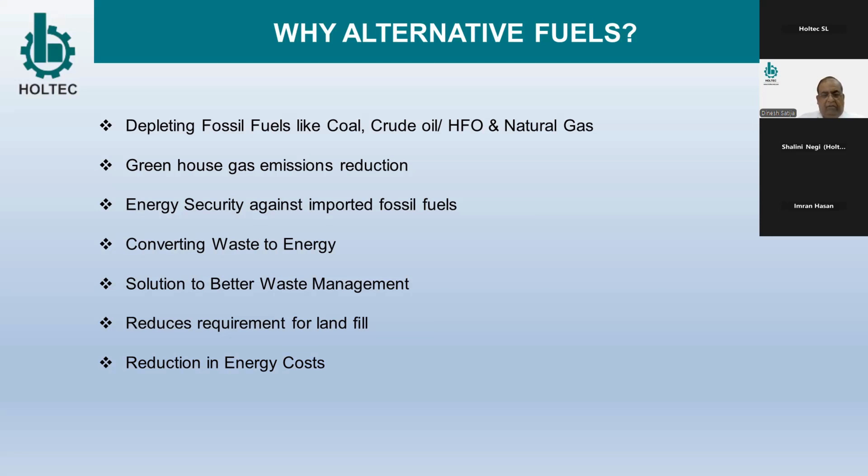And the final and most important part is energy cost. Ultimately, use of alternate fuels impacts your cost. It reduces your cost of production.

So today our agenda is basically focusing on the Indian cement industry. What is the AF journey? The alternate fuels have been there for 20, 30 years, people are using them. So in India vis-a-vis other countries, what is the journey for alternate fuels? Then, what are the available alternate fuels and types in India?

Then we will look at what are the impacts of AF usage, what are the technical advancements we foresee in the coming future with respect to preprocessing and co-processing systems in AF, what is the Holtec role for enhancing AF usage, and what is our global experience with respect to alternate fuel usage in the pyro process. We'll present one or two case studies about AF usage and Holtec's role in that.

So, Indian cement industry AF journey. If we look at the growth of alternate fuels in India, in 2010 the first CPCB guidelines came regarding co-processing, and AF usage was around 0.6% in 2010. From 2010, it increased very gradually to 1.1 and then 3% in 2016, when the hazardous waste management rules came into existence.

Then it shifted to include biomass, MSW, and other waste. Our usage was 4%, and it increased gradually to 6% in 2023. In 2025, we are expecting around 7% TSR.

This is an overall number. And by 2030, our industry target is 25%. So if we see from 2010 to 2025, 15 years, the increase is just 7%, from nearly 0 to 7%. But our target is now 25%, so the target looks quite huge. The target looks tough, but at the same time it poses a lot of opportunities for AF usage in the coming years.

So maybe in the next 5 years, you will find a lot of boost on alternate fuels from every quarter, and we can see a lot of changes take place with respect to alternate fuel usage. So if we talk of major players in the cement industry, where do they stand?

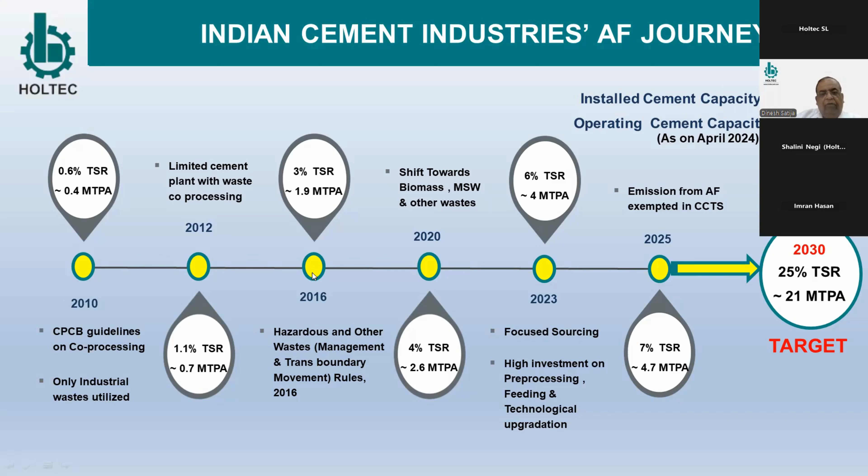Now, if we talk of 25%, we foresee the source of waste stream at that level. The various sources will be MSW, plastic, hazardous waste, liquid waste, biomass, paint, resin, carbon black, etc. The major source expected is MSW and RDF, around 10%, which is nearly 40% of the total alternate fuel usage. So MSW will play a very important role in the coming years. As we can see around us, there is a huge stock of MSW lying, which needs to be depleted in the coming years.

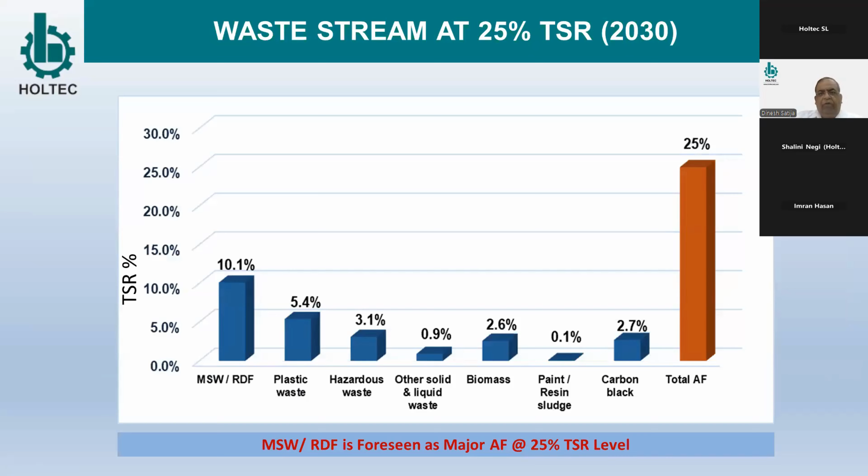If we look at the overall country situation, we have over 170,000 TPD generation of raw solid waste. Out of that, typically 20 to 23% can be converted into treated MSW or RDF. This potential is around 35,000 tons per day. If you see the breakup, organic waste constitutes 50 to 60%, and paper, cardboard, plastic, and other usable fuel materials work around 20 to 23%. Glass, metal, and other materials just have to be removed from the MSW. Looking at the cluster-wise distribution where cement plants are located, we find Maharashtra, Tamil Nadu, Gujarat, UP, and Chhattisgarh are the major sources of MSW serving in future, providing basic raw material close to the cement clusters.

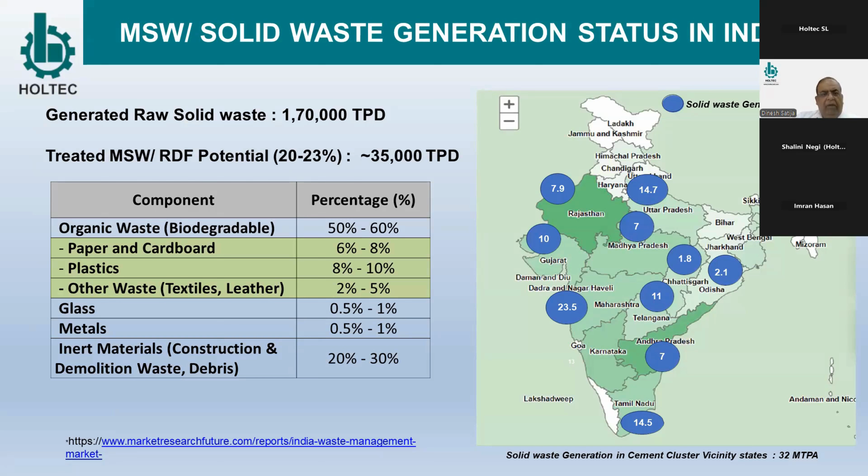If you look at the overall country situation, we have over 170,000 TPD generation of raw solid waste.

Now, what does 25% TSR mean? TSR is the thermal substitution rate in terms of heat. So if we say 25% TSR, we mean the overall saving in cost of production is around 175 to 200 rupees per ton.

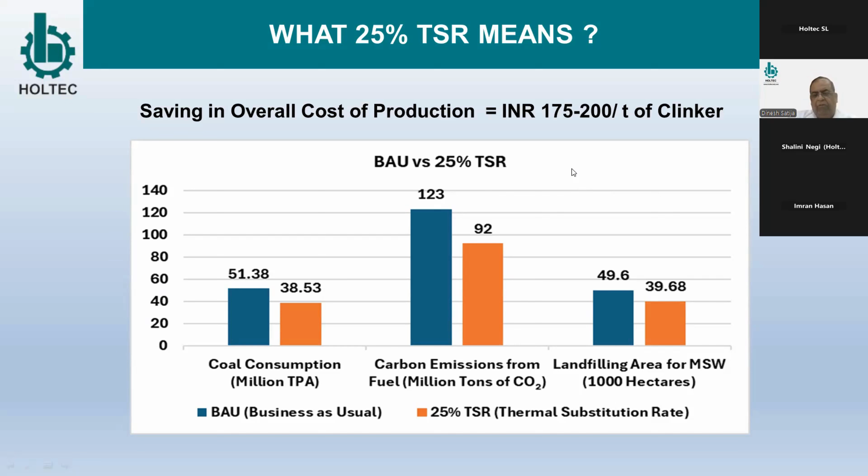If we talk of other components: if we continue business as usual without any effort on AFR, our coal consumption will end up at 51.38 million tons per annum. If we go for 25% AFR, it will get reduced to 38.53, around a 25% reduction in coal consumption. Similarly, carbon emissions will reduce by 25%, from 123 to 92 million tons of CO2. Landfill area will also reduce from 49.6 to 39.68 thousand hectares. So this is the broad impact of AF if we are able to achieve 25% by 2030.

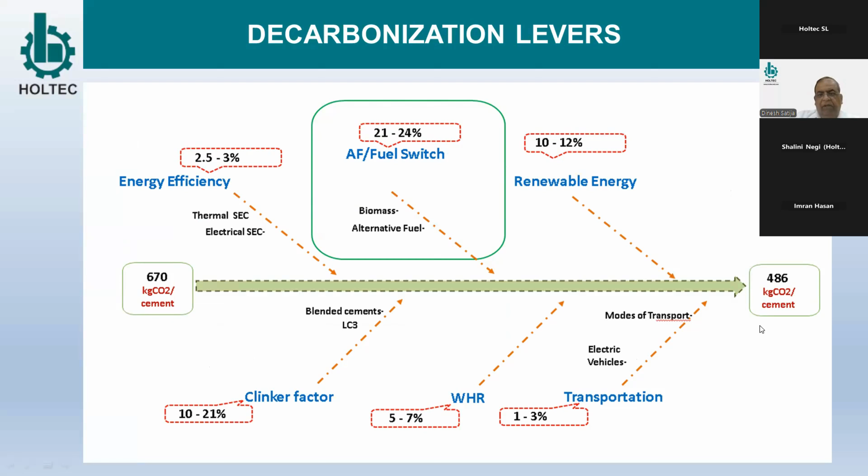Now, when we talk of alternate fuels, we are ultimately going for decarbonization. That is the long-term goal for the whole planet. So we are providing some decarbonization levers. If 670 is the current level, we can go up to 486 if the following measures are taken.

One is energy efficiency, with a potential of 2.5 to 3%. The Indian cement industry is in a very good position on fuel and power consumption compared internationally. The next factor is clinker factor reduction, which has a potential of 10 to 21%. Fuel switching to alternate fuel has a potential of 21 to 24%, which is very good. WHR offers 5 to 7%, renewable energy 10 to 12%, and transportation shifting to electrical and such offers 1 to 3%. By all these levers, we can bring our CO2 level down by around 25 to 27%, from 670 to 486.

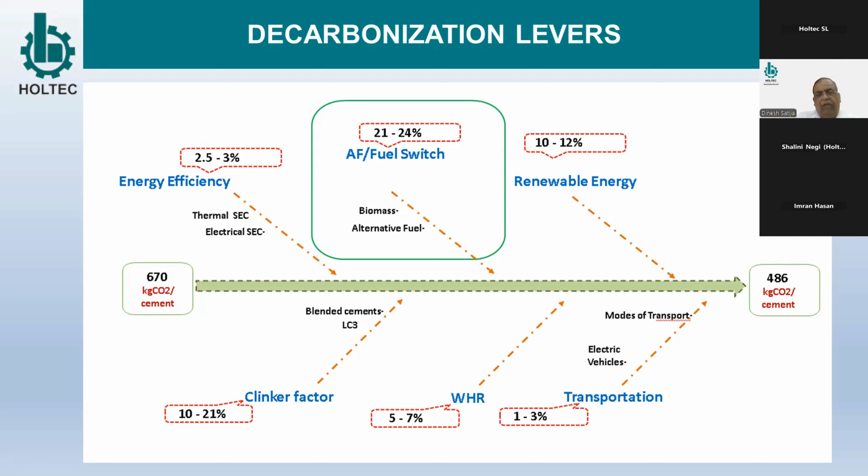Now, when we talk of India, we get interested in the global scenario. We are giving you details about various countries. On the right side, mainly European countries like Netherlands, Germany, and Austria are at 68, 71, and 76%. For Europe overall, around 46% is the average EU level. India is nearly at the bottom of the table, around 7%, along with China at around 8%. The world average is around 18%. So we are at a very low level, meaning the potential is very huge.

We can go to a much higher level, as we have improved in our power and fuel consumption figures. The AF consumption level also has a potential which has to be exploited in the coming years.

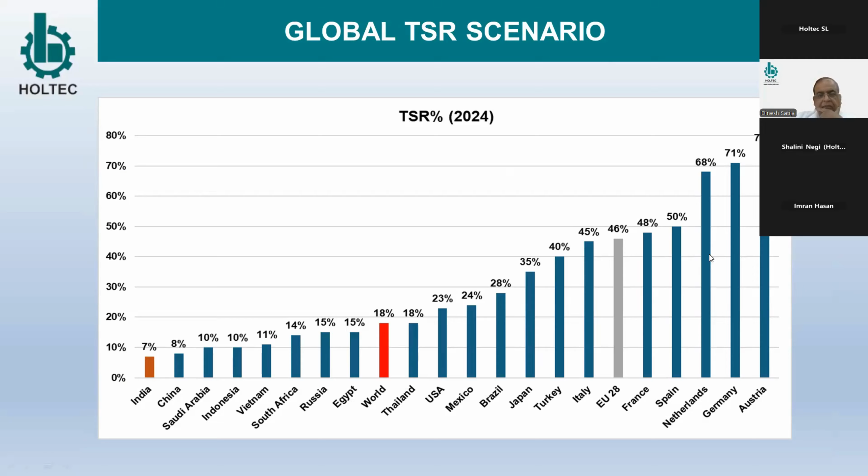We have summarized a few reasons why we are lagging behind the European Western countries. One is regulatory and policy framework. Western countries have very stringent norms, strong enforcement, and effective compliance. Whereas in Indian conditions, policies are there, but regulatory framework enforcement mechanisms are still evolving and compliance is weaker and less stringent.

There are some economic considerations too. Western countries' costs are going up because they're putting a lot of environment tax to discourage use of fossil fuels, but at the same time they're incentivizing alternate fuels, reducing cost and offsetting initial investment. Whereas in Indian context, coal is our main source of fuel and it's available within the country, so our cost of fuel is much lower comparatively, and financial incentives are relatively very limited. So initial investment and fluctuating availability are causing major problems, and that is also a deterrence.

Then waste management and supply chain. In European countries and the whole Western world, waste management systems are well placed. They have well-structured infrastructure and proper separation systems and processing units, providing ready-to-use alternate fuels to the cement plant. Here the situation is not like that. Waste management infrastructure is still underdeveloped. Collection, sorting, processing of waste is inefficient, leading to inconsistent supply of alternate fuels. So supply availability is really a constraint till our infrastructure improves.

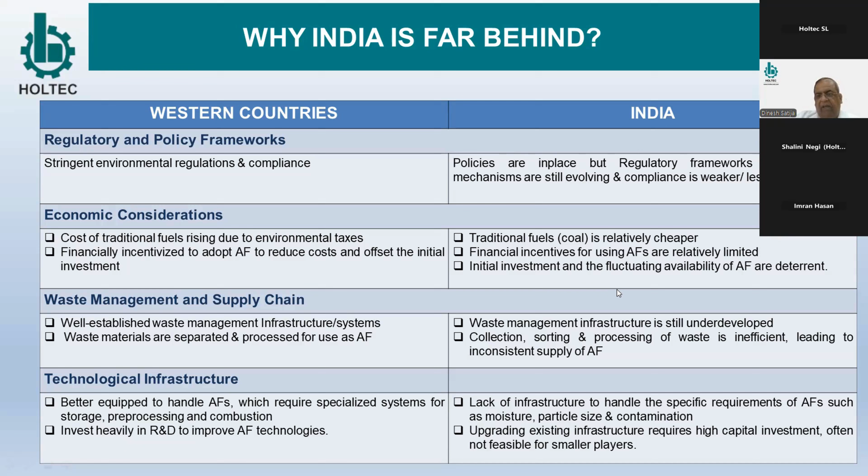Upgrading the infrastructure needs investment. So we find small players find it difficult to invest in developing infrastructure because their cost will be high if we go for higher alternate fuels. That is another hindrance.

Now, a lot of things are related with government policies and plans which we cannot control. But we can talk of infrastructure gaps for achieving 25% TSR.

Holtec has been studying this, going to various plants and studying the available infrastructure and issues. We find that pre-processing plants to condition RDF and other fuels suitable to kiln requirements are very limiting. There are very limited number of pre-processing units.

Alternate fuel storage and advanced fuel feeding systems, mainly related to infrastructure within the plant, are also very limited, but now it is growing. Many plants are investing now in developing proper storage, advanced feeding systems, and handling facilities for all the fuels. This is an upcoming thing - of late we find people going ahead with this kind of investment.

Then bypass systems - as we know, in India bypass systems are not available because we don't have the raw material like that, except in Gujarat, few plants in the Kutch region. The rest of the country hardly has any bypass system available. So all this has to be installed if we talk of our AFR usage, and that calls for investment.

Then fuel handling and firing system - we are mainly dependent on coal and solid material feeding, so our burner system and feeding system are available with that facility only.

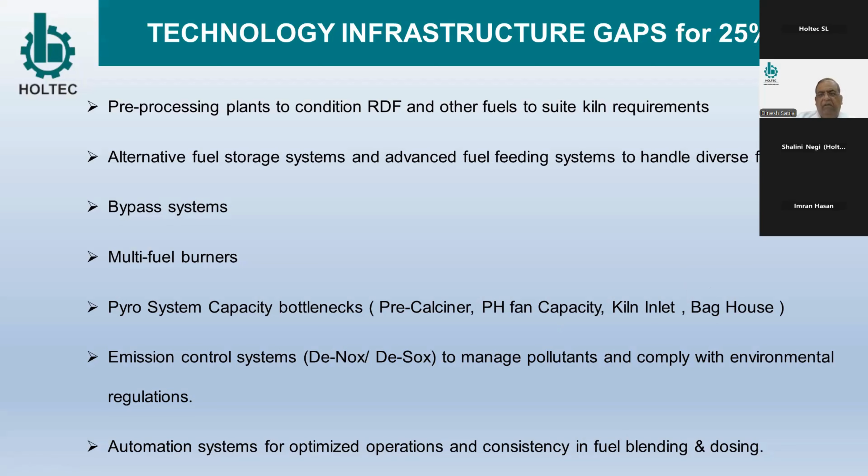Now, if we talk of alternate fuels in Indian context, we find agriculture biomass - rice husk, wheat straw, corn stover, sugarcane bagasse. Some of them have issues like chloride, in some cases ash content is high, but they are all used as alternate fuels suitable for pre-processing and co-processing.

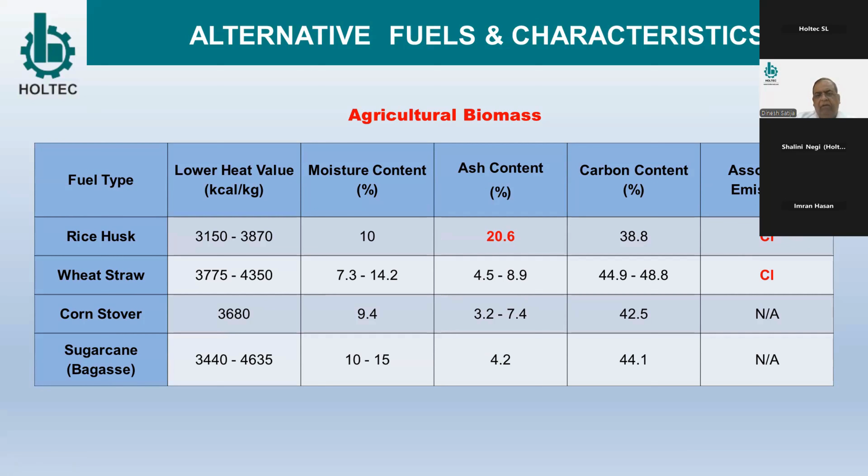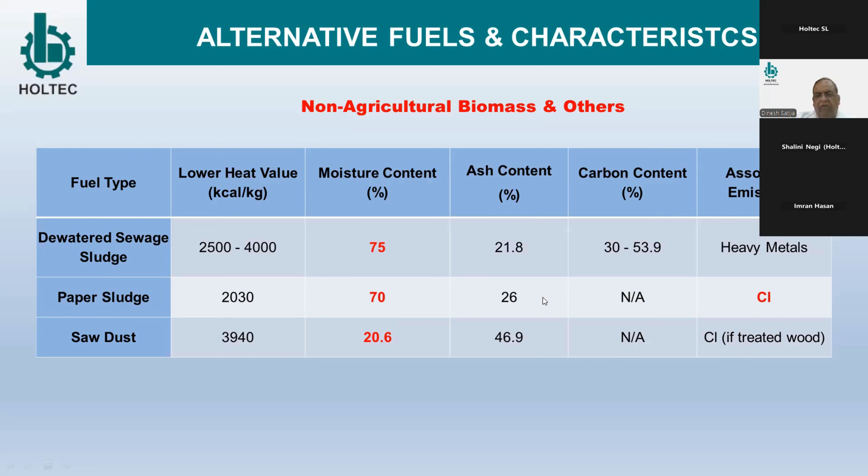Non-agriculture biomass is another type of fuel - dewatered sewage sludge, paper sludge, sawdust - but in these cases moisture is really high, and in some cases heavy metal and chlorides are also at higher levels. Then we have hazardous waste, pollution, petroleum-based waste, where we have the issue of dioxin and heavy metals which can cause problems. We need to have a solution for that.

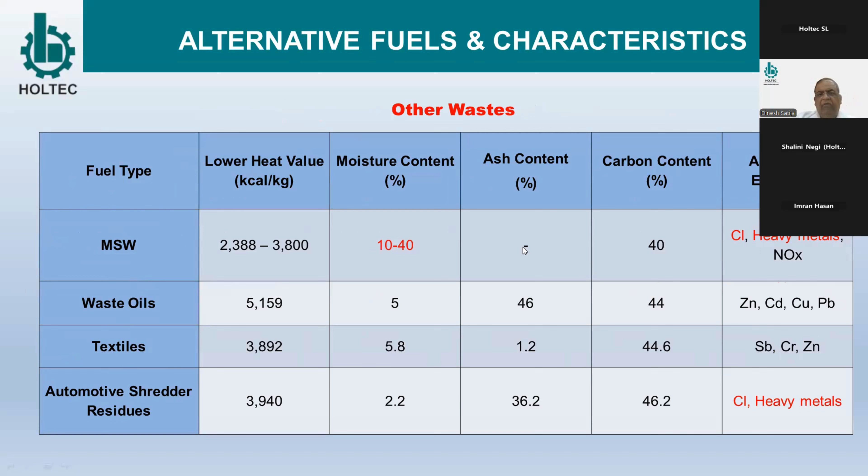Then other waste includes MSW, waste oil, textile, and automotive shredder. These are essentially the alternate fuels being used in industry. Now, what is the major impact of AF usage?

It all depends on which alternate fuel (AF) we are using, but broadly we have to study for each AF what is the composition and how much percentage is being used, and assess the system accordingly. Broadly, we find that chlorine bypass requirement comes with higher AF usage.

It has a negative impact on specific heat consumption, and it impacts production negatively, mainly due to fan capacity limitation and calciner sizing. There is impact on clinker quality in many cases, and environmental emission impact too. It can impact raw mix design - specifically if alternate fuel has high ash or a high volatile component, we need to optimize the raw mix. If there is presence of heavy metal, that also can impact it.

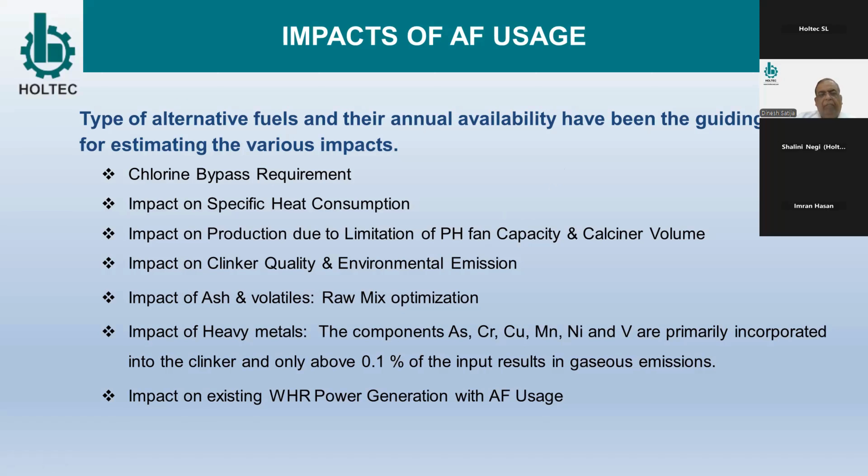That needs to be checked so it doesn't cross limits. Another impact: if we have an existing WHR already installed and we increase alternate fuel usage, it may have a positive impact on WHR generation. But that becomes a problem because our WHR is designed for a particular gas flow, and we find flows have gone up, so higher heat availability is there. So we often need to study whether we can improve the WHR potential. These are the broad impacts of AF usage.

When we talk of technology, we have to see what technological advancements are coming up now, mainly when we talk of going for 25% TSR or higher.

If we talk of MSW, we find there are basically two components. One is normally provided within the plant boundary, and the rest has to be provided at the site where MSW or waste is collected. That includes the process of MSW unloading, storage, inspection, and primary size reduction - we have to reduce it to about 200-300 size there only.

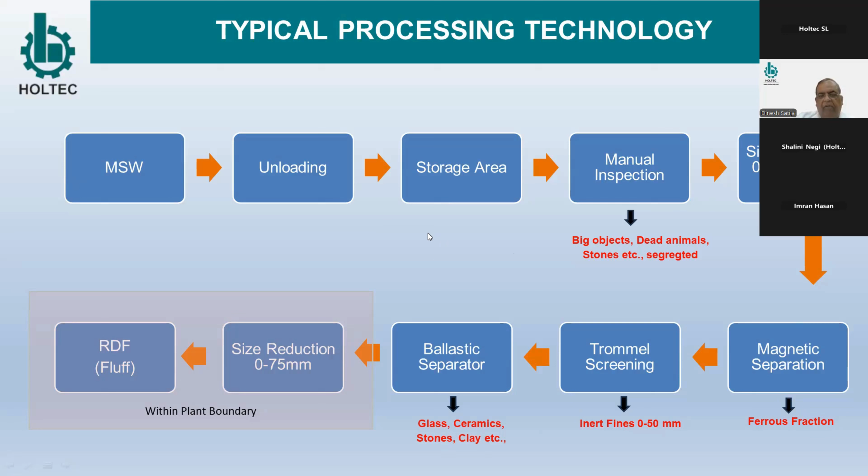Then some basic separation like ferrous fraction, inert material, and glass, ceramic, stones - all these have to be separated there, and then it is transported to the plant for further size reduction, say up to less than 75mm, and converted into fluff if that facility is available in the plant. This is how the whole process goes.

If we see the typical flow sheet, on the co-processing pre-processing side, we receive material from the site - partly processed - and put it into the shredder. From the shredder, after the magnetic separator, it is screened, so the 75mm or less portion is separated and stored for further feeding into the pyro process.

The upper portion is fed into the belt conveyor through an extractor. It passes through various belt conveyors and goes to the calciner through a vibro feeder and electrical double valve airlock system, so that false air infiltration is minimum. This is a typical flow sheet for feeding and pre-processing of AF inside the plant.

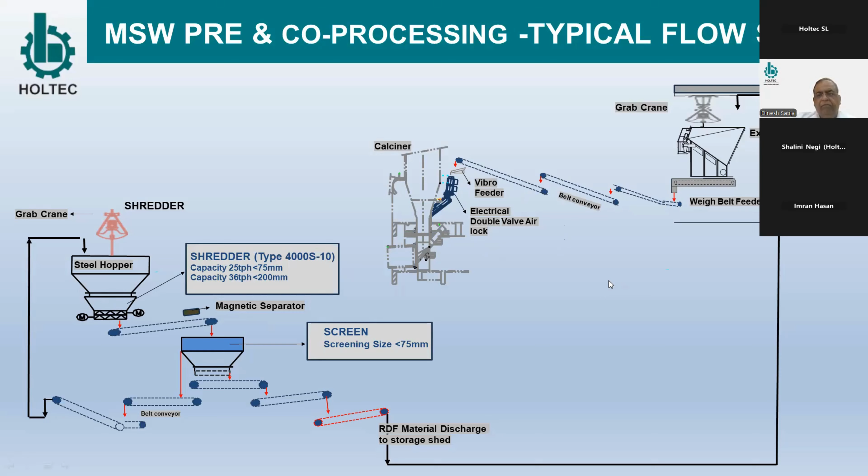If you see the picture, the left side is the feeding system where all the waste is being fed into the shredder, and the right side is the shredder's inside view.

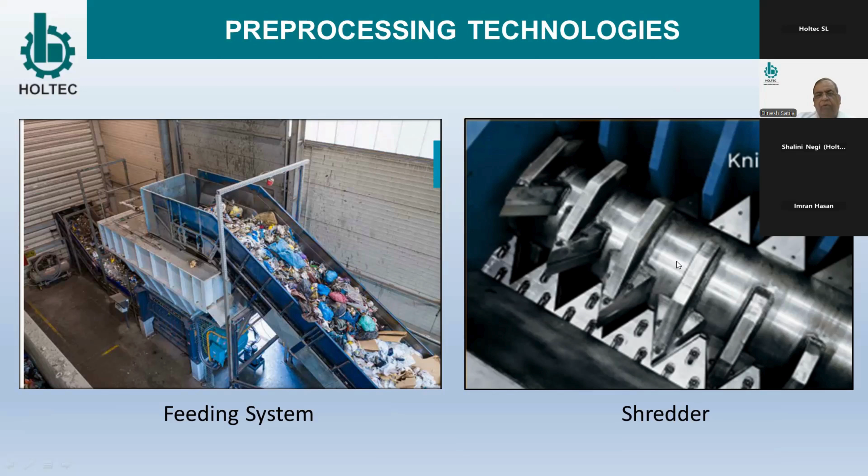Now when we talk of higher alternate fuel usage, a few technologies are coming up and available in the market, but in the Indian context, not much is seen so far because in India the average level is still 7%. Some players striving for bigger size may be forced to adopt these types of technologies.

One is the pyro rotor. These basically fire alternate fuel outside the calciner in a rotating vessel using only tertiary air. It falls into the system and nothing comes out - everything goes into the calciner, but firing takes place outside, providing additional retention time good enough to complete combustion of the material.

Generally it is useful even for whole tire chips, big size material, and coarse material, because in the Indian context the material available is generally bigger size, coarse material, and our pre-processing is not that great, so this system takes care of that. It gives adequate residence time for complete combustion and is very good for waste with extremely poor burning properties.

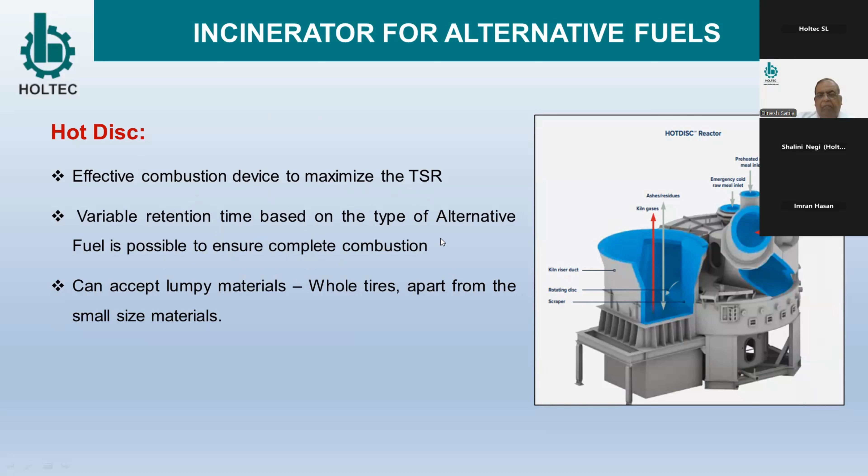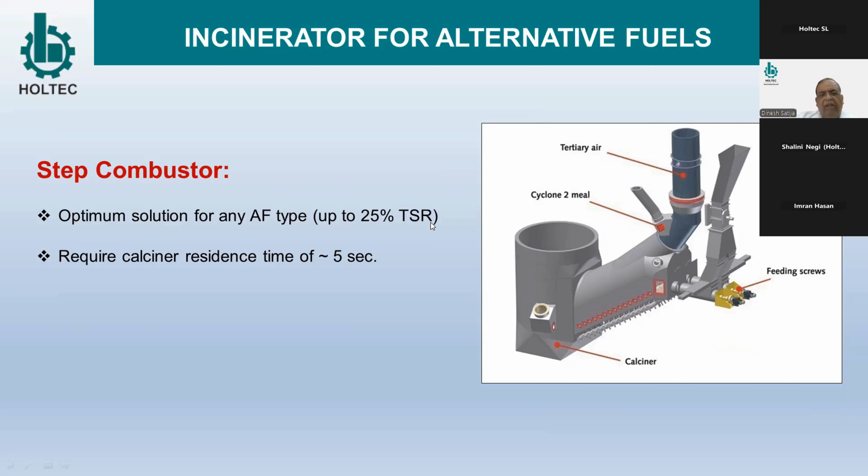Another option available in this case is a step combustor. This is a relatively standard, fixed type system, which also increases the residence time for combustion of mainly fuel, which takes more time to convert into fuel heat. So these materials are fired in this system, but this particular thing has some limitations - it can go up to 25% comfortably. But if we talk of higher TSR, 30, 40, 50%, then we need to go for other options.

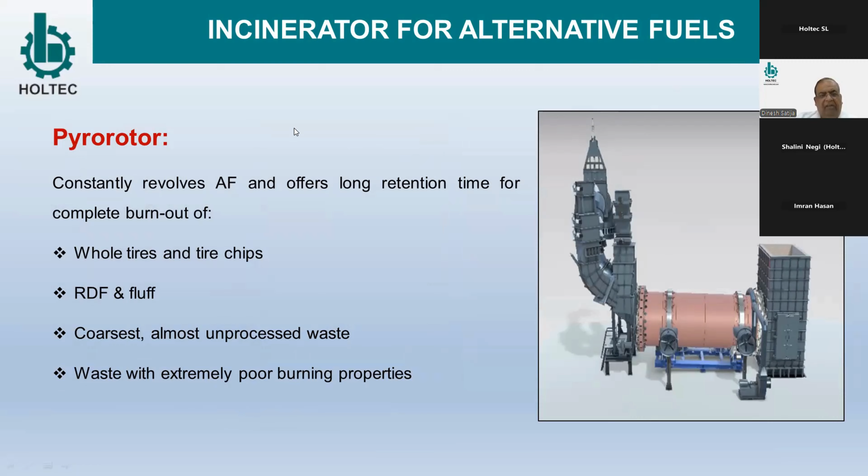Now, when we talk of higher alternate fuel usage, few technologies are coming up and available in the market. One important point is that the Calciner also plays a major role in this. Most places you find the Calciner is not suitable for higher capacity, higher AF usage. Holtec has modified the Calciner at many places - the residence time has to go up at least 5 seconds minimum. So if no option is available, we have to put up a new Calciner completely, take out the duct, and bring it back into the system as an independently supported system. This is an important modification required when we talk of higher AF feeding, higher percentage TSR.

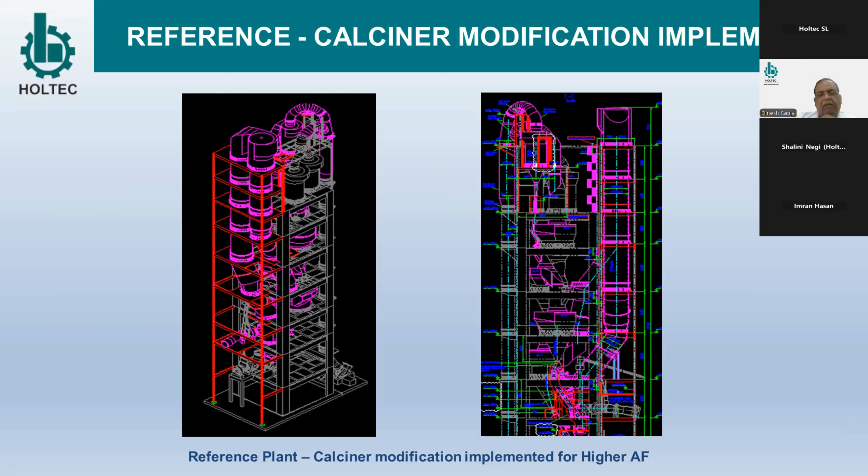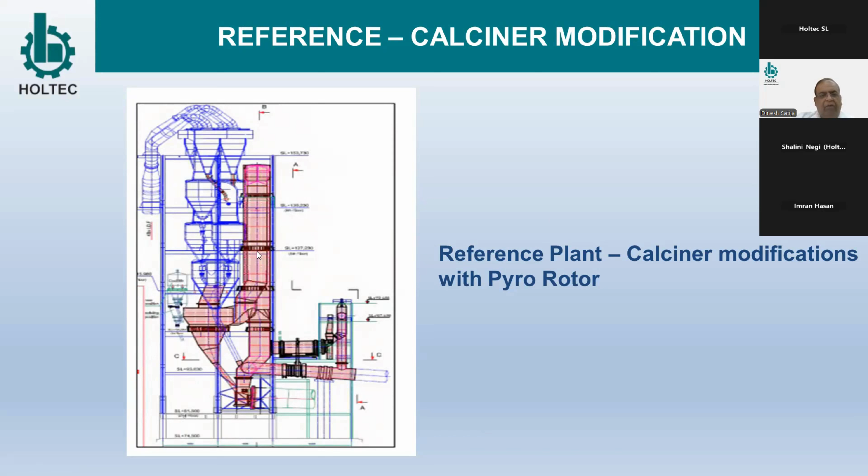So when we talk of Holtec's role, we play both our roles - I mean both roles are there. First part is conceptualization, and second part is execution.

So we carry out feasibility studies, which involve AF evaluation and impact assessment of whatever identified alternate fuel. We need to assess the fuel's impact on the system, on clinker production, product quality, emission, pyro equipment performance, and stability at different levels of TSR. So at different TSR, we estimate what will be the impact on the system and on product quality, quantity, and heat consumption.

Then we estimate raw mix changes required for AF with enhanced AF usage and the compatibility of the existing system. With increasing AF, our system bottlenecks get exposed, so we have to find out what modifications are required. Since we always have various solutions to de-bottleneck our system, we need to take a decision, and that needs a capex estimation for each modification or each level of substitution. Then we work out a simple payback so it's easy to decide to what level we want to go for substitution.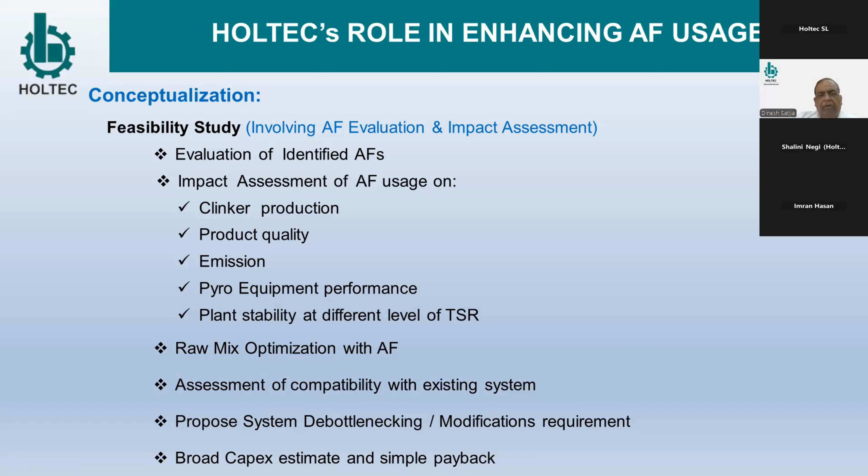So this becomes the conceptual part. Then next, once a decision is formed by management, execution comes into play. Our role starts with basic engineering, procurement services, detailed project engineering, equipment inspection, and site supervision. So that becomes the execution part, and we play a major role in this. In the past, we have executed 50 completed projects, which also include studies and actual execution.

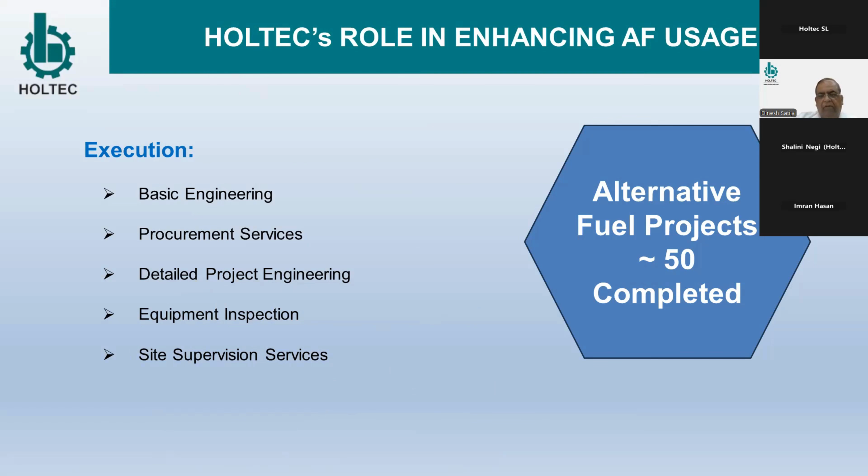Now we come to the case study. Recently, we completed one cement plant upgradation or modification in Europe, where the existing capacity of the plant was a 5-stage preheater plant with 4,500 capacity. TSR was already running at 38%, which majorly was fed into the main burner. Calciner was at 6%, and the main reason was the calciner size - residence time was very small, 2.5 seconds. So they were not able to push more fuel into the calciner. Further, the coolers were also old generation coolers, so there was a lot of possibility for modification to increase heat consumption efficiency in the cooler.

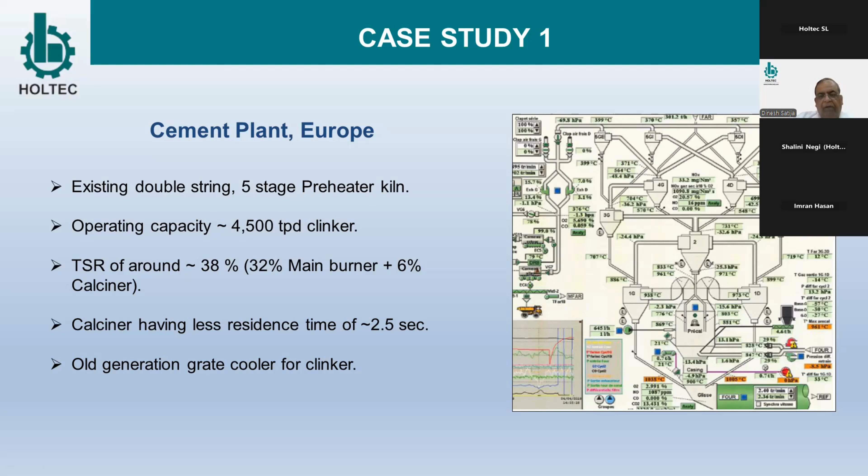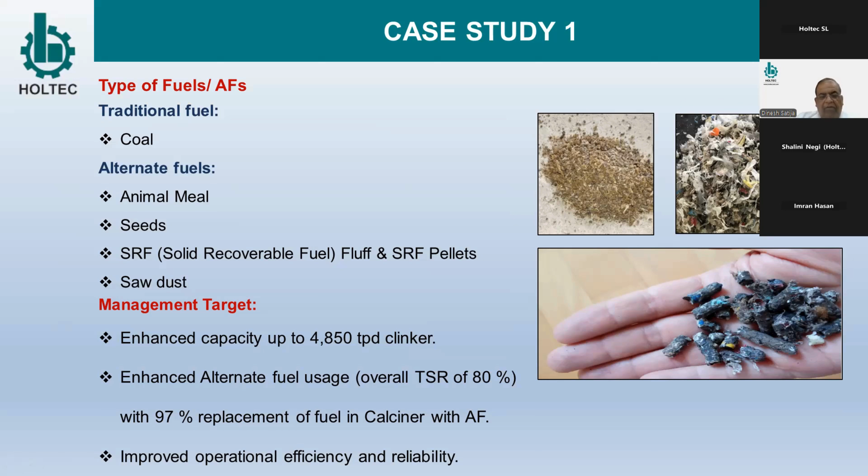So this is a plant in Europe, and these were the main alternate fuels. Main traditional fuel was of course coal, and alternates were animal meal, seeds, solid recoverable fuel, fluff, sawdust. The management target was to enhance capacity marginally from 4,500 to 4,850, but the major thrust was to enhance alternate fuel usage. Overall TSR target was 80%, with 97% replacement in calciner fuel - majorly we were supposed to replace the complete fuel in the calciner with alternate fuel. And of course, overall operational efficiency improvement and reliability improvement.

So the major modifications which were done was top cyclone replacement, a new complete calciner which has a residence time of more than 8 seconds. Kiln inlet and tertiary air duct also was modified. And of course, an ID fan with higher capacity was installed to take care of additional volumes.

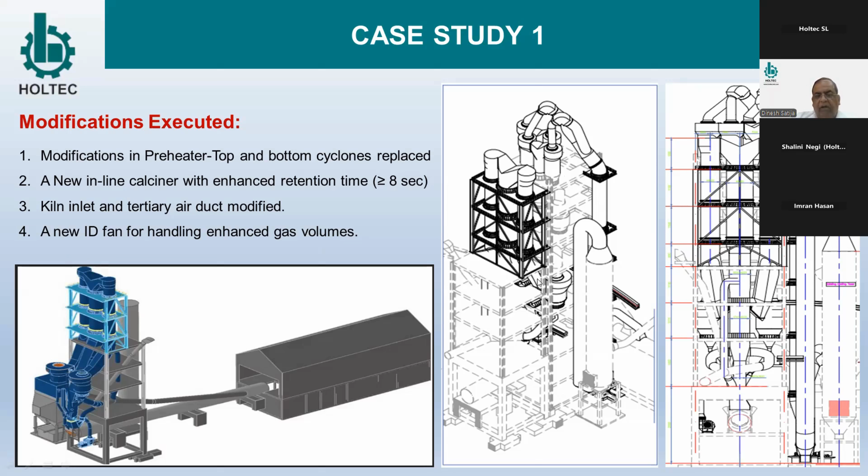And if you see the diagram, the new calciner is outside the existing preheater building, and top stage and bottom stage cyclone also was modified accordingly, along with new inline calciner.

Then there was a replacement of cooler. New generation cooler was installed, and the process filter were also extended for kiln, and main bag filter was also extended. The capacity was increased, and with cooler, hot hood was also modified accordingly. Original hood was very small.

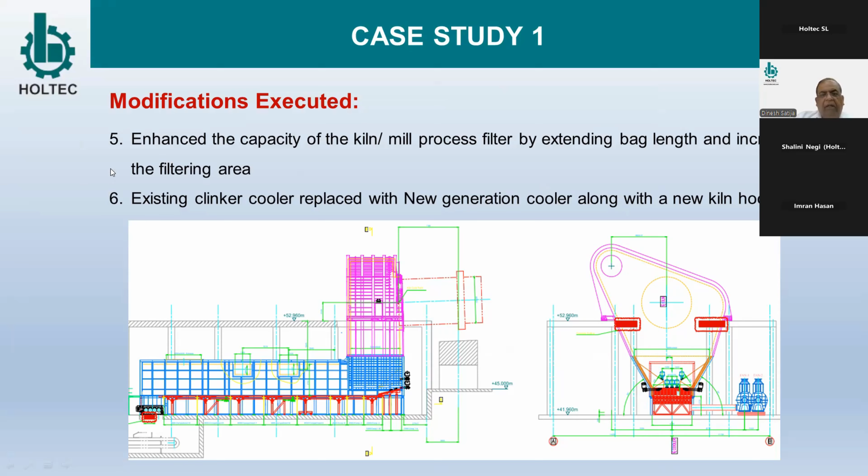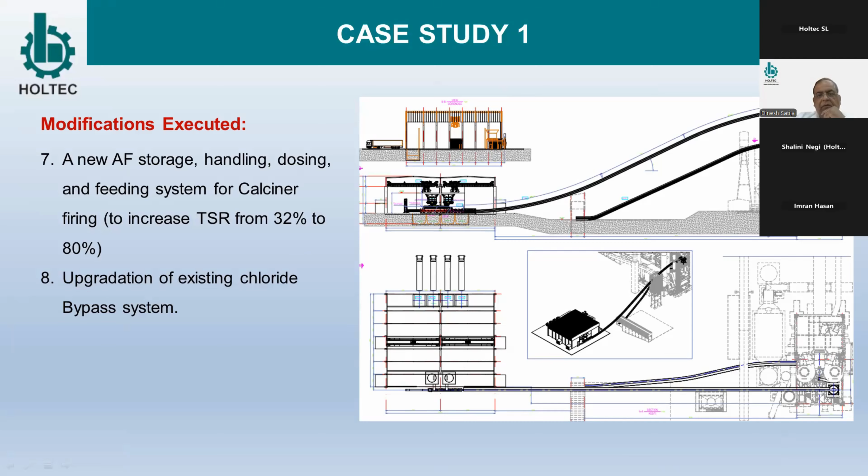Now, key aspects which were considered here, there were a few interesting things.

One is that here, because this plant was getting pre-processed fuel already from some source outside the plant, pre-processing activity was not done inside the plant. So the AF size reduction was 1 to 2 mm, and homogeneously prepared alternate fuel was taken up to the plant site.

Then for chloride bypass, if we talk, of course the bypass was extended, but for the gases, there was no separate vent provided. All the bypass gases were fed into the cooler recuperation zone after the static grate. So the bypass vent gases were going into the cooler. There is no separate vent because there are certain norms in EU for that. So that was a different concept which was followed.

And of course, bypass dust was used for cement, added into cement later on. And similarly, the alternate fuel storage shed vent gas, which many times is vented into air, here all those gases were taken and put into the cooler area, into the first fan only, that quench air fan, so that was used for quenching. This also minimizes the foul smell issues which are very common in such AFR feeding areas, so all that foul air was fed into the cooler.

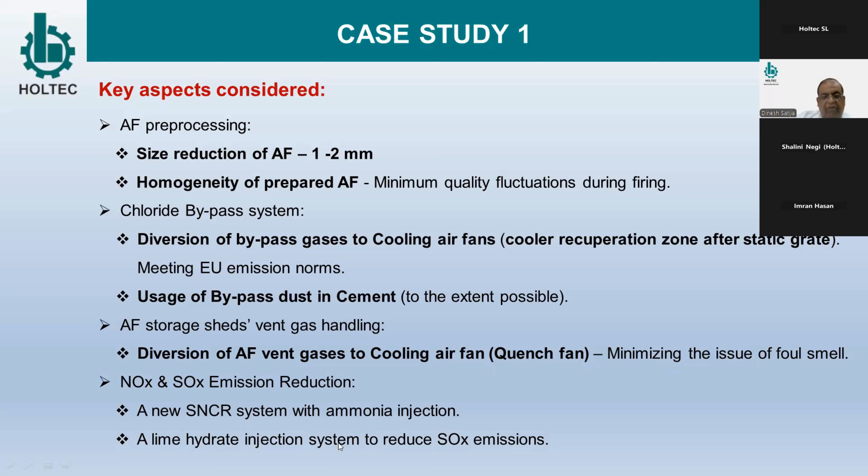Plus for NOx and SOx, there was SNCR and hydrated lime injection system already provided there. So finally, after complete completion of the project, clinker production target achieved was 5,000 TPD clinker against 4,848.50. And there was reduction in heat consumption, primarily due to capacity increase and new, more efficient cooler. Overall TSR achieved was 81%, and calciner TSR replacement was 99%, and cooler thermal efficiency increased to 75%.

So this was the case in Europe where substitution rate was very high, and of course one contribution is very good pre-processed fuel which was available there, that has been used with a proper pre-processing unit, with proper co-processing and all the desired modifications taken to take care of such a high substitution. And it was successfully completed.

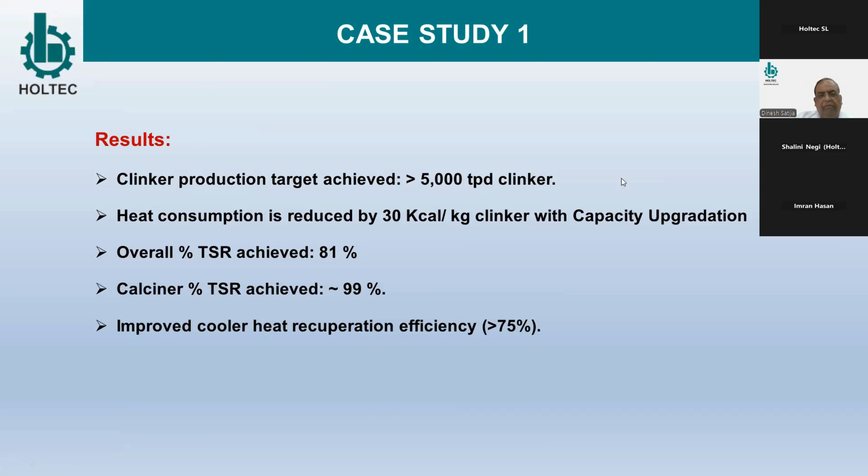Now, this is another example of a cement plant in India where the TSR had to be increased to 35%. So the main alternate fuels were mainly RDF and some other biomass and organic waste. So majorly it was 29.8% RDF out of 35%. That was the target.

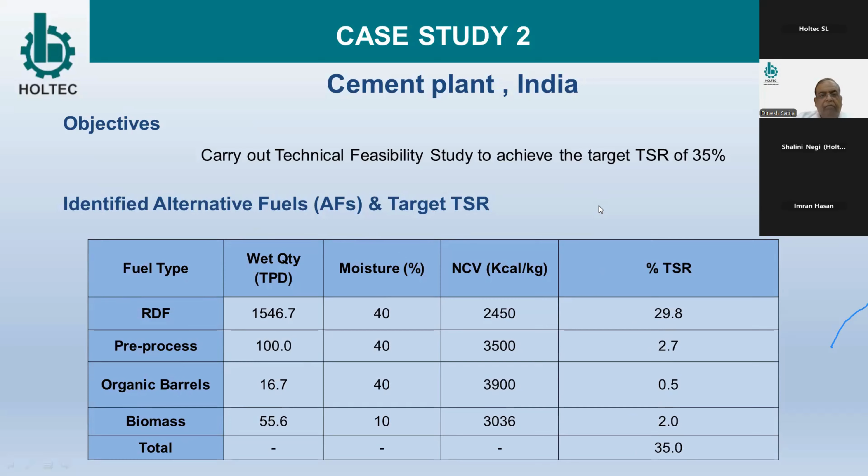Plant capacity 8,000 TPD, thermal substitution rate already 20% was there, was already operating. Heat consumption 741, and chloride content in hot meal was 0.44, which was well within the range, so no bypass requirement was there. And calciner was adequately sized at 14 seconds.

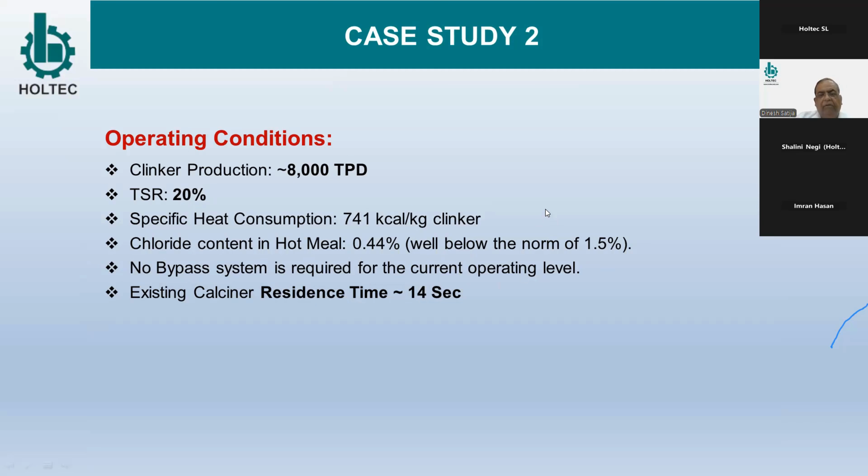From this operating condition, now we had to go for 35% TSR. So we studied the impact of 35%. We estimated that heat consumption is expected to increase by 23 kilocalories because of high moisture of 40% in RDF. Production impact was around a 1,000 ton per day reduction in clinker capacity if we don't take modification in the system. So this was the expected reduction, which was quite significant.

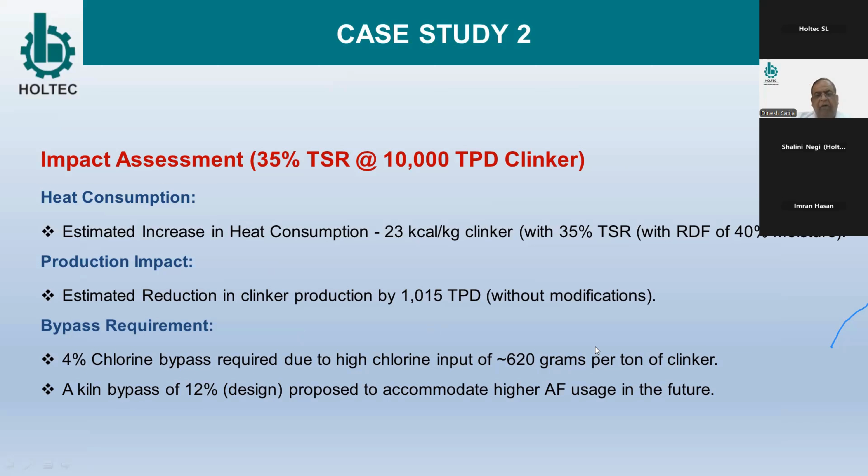Bypass requirement worked out now at 4% chloride bypass, because previously with 20-30%, there was no requirement. Now we required 4% chlorine bypass, and we proposed a 12% design, because in case they go for further increase in capacity in feeding AF usage, maybe that will also be used, so provision was kept for higher capacity.

So our major proposal was to go for a new preheater fan, the replacement of top stage cyclone. That also helped in reducing pressure drop, return dust reduction to 4 to 6%, and overall saving of 6 to 8 kilocalories because of this modification. And then tertiary air duct modification, enlargement of tertiary air duct from 2.9 to 3.5, or the idea was that we can even go for a parallel TAD.

So the result was that we achieved some 35% TSR, and the production loss was averted because we took the required modifications. And it was achieved, 35% TSR.